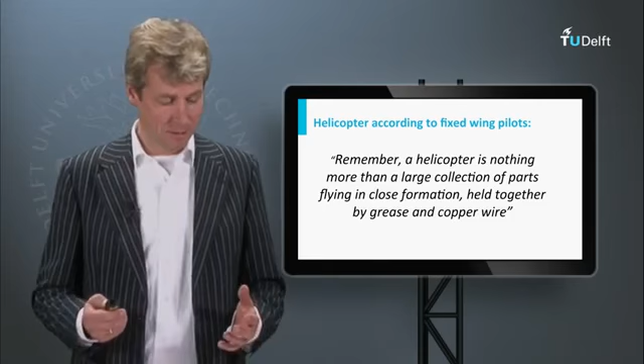And why is this? Well, when you sit in a helicopter, everything vibrates, everything shakes, and there are a lot of disadvantages of helicopters. They're noisy, less fuel efficient, and hence worse for the environment. More expensive as well, because they're technologically more complex.

So why would you want to fly a helicopter? Well, clearly, there are also advantages. The fact that you can do vertical takeoff and landing without the need for a runway, and hover and remain in position, outweighs all these disadvantages. These two lists go to show that you should never just count disadvantages and advantages to make a decision, because otherwise you would never have had helicopters.

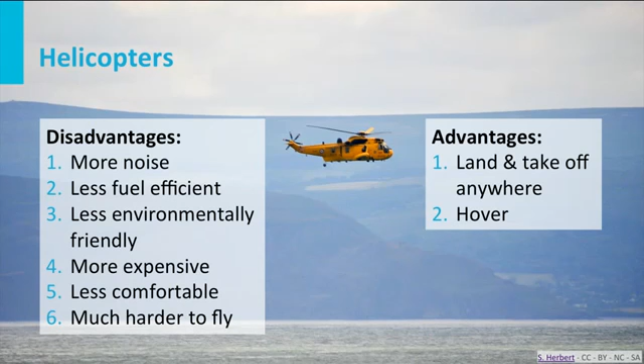And helicopters have been around for quite a while. In fact, they were already experimenting in the pioneering years, around the 30s, and they stayed experimental for quite some time, because not even during the Second World War did they really reach operational status in large numbers. It was really afterwards that we saw them. Sikorsky was one of the pioneers who was able to overcome the complex problems which you have when you fly a helicopter.

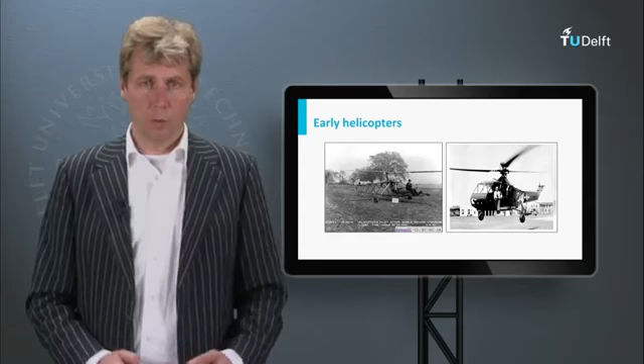And why is that? Well, one of the reasons is that everything is connected. If you look at the principle of a helicopter, we see the rotor having two functions: it provides both thrust and lift. And this makes a nasty connection between the vertical and the horizontal forces.

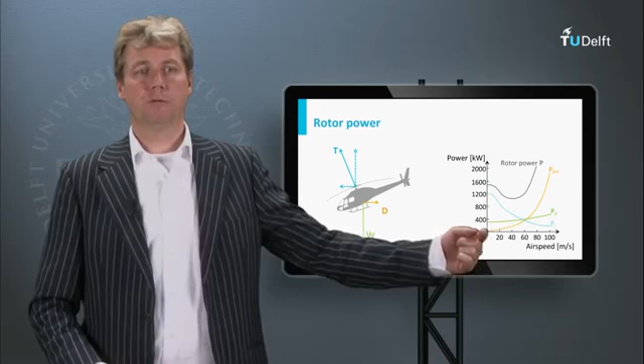Also, an example of a complication is if we look at the power which is required, we see that the lifting power actually decreases when you increase the speed. But of course the propulsive power that's required, the yellow line here, increases. That's because when you increase the speed of a helicopter, the rotor also starts to act as a wing and generates its lift without the need to bring it via the torque to the rotor. So you see that the required power, depending on speed, first decreases and then increases. That's a very strange relation already just looking at the overall perspective of the force equilibrium of a helicopter.

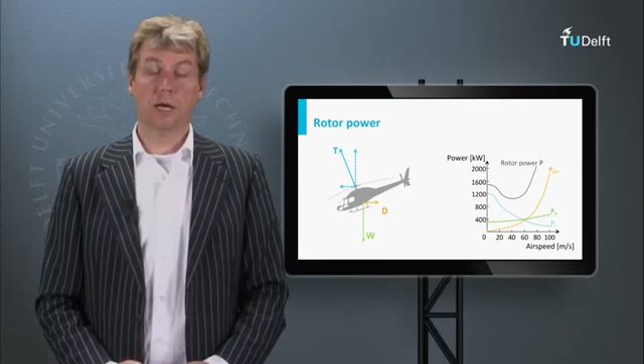But what's even more complex is how to control a helicopter, because there are many things to control. Let's have a look at these controls. I hope you can see it.

There is a stick which is called the cyclic control, and this you can use to bank and control the attitude, both in the longitudinal and in the lateral direction. It's called cyclic control because you change the angle of attack of the rotor blade when it's on the right side, and for every rotor blade this is something that cyclically happens. So you change the difference between the left and the right side, or the front and the aft side, for the angle of attack of the rotor blades. In this way you can bank or pitch up with a helicopter. That's the cyclic control with the stick.

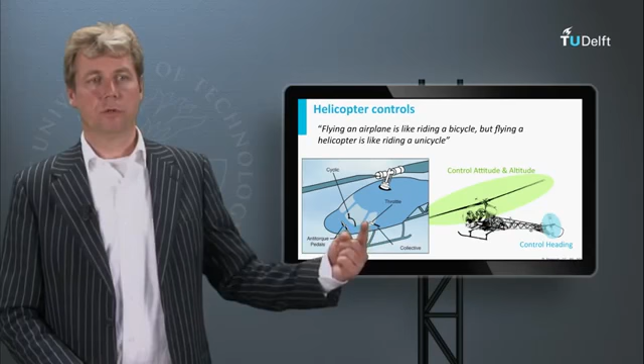But there's also the collective control. It's a bit like a parking brake in a car. If you pull the collective control, you increase the angle of attack of the rotor blades collectively, that's why it's called the collective control. And on the same handle, the same lever, you will find the throttle, which is a twist grip, like a motorcycle, with which you can increase the amount of power that's being fed to the rotor by the engine.

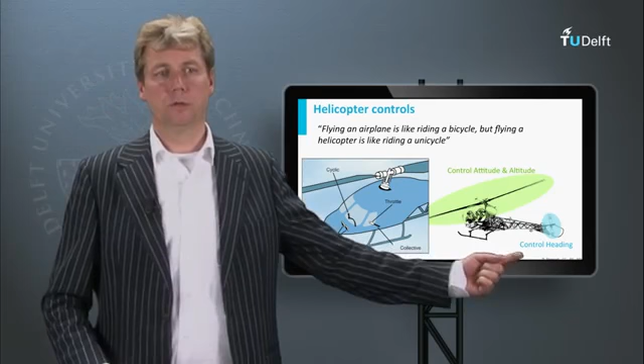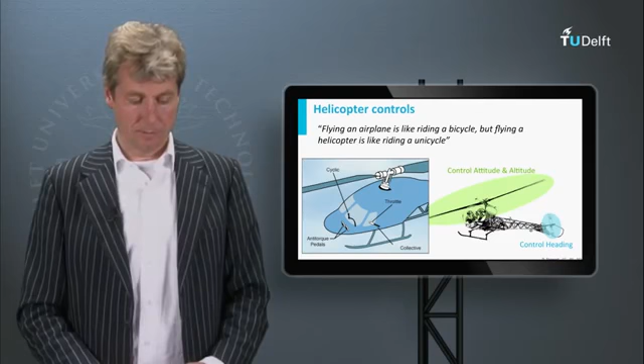Then to control the heading of the helicopter and to counter the torque of the rotor, we also have the pedals, in the same position as where you'd find the rudder pedals in a fixed wing aircraft, to control the amount of angle of attack of the tail rotor, so the amount of side force created by the tail rotor. So these are more controls than in a fixed wing aircraft, where the whole cyclic collective thing is absent. And this makes helicopters very hard to fly.

We have a video clip of a gentleman showing that helicopters are very hard to fly. He has not had flight lessons in a helicopter yet, but he has bought one already. And as men typically do, they don't want to wait until they finish the complete manual when trying something new. In his defense, he did not intend to fly the helicopter, he just wanted to see whether it was operational, so he turned up the engine to see whether it functions. When you've acquired something this expensive, I can understand that. Let's see what happens.

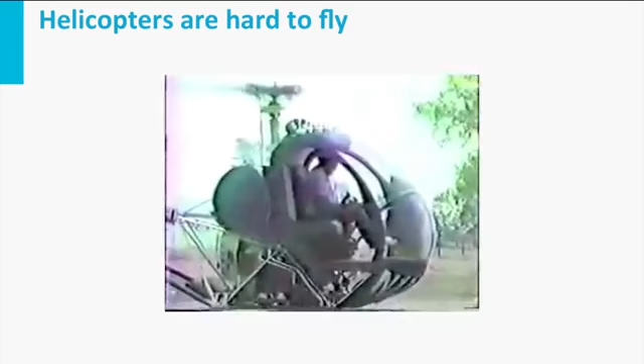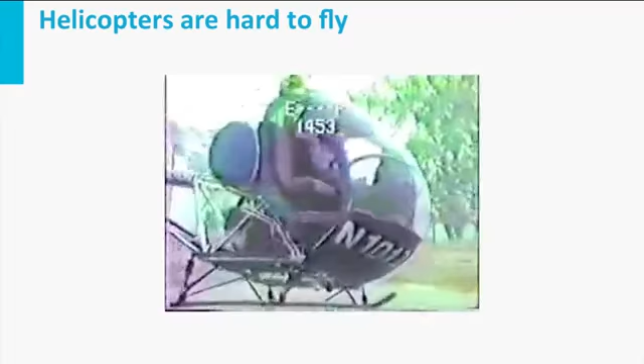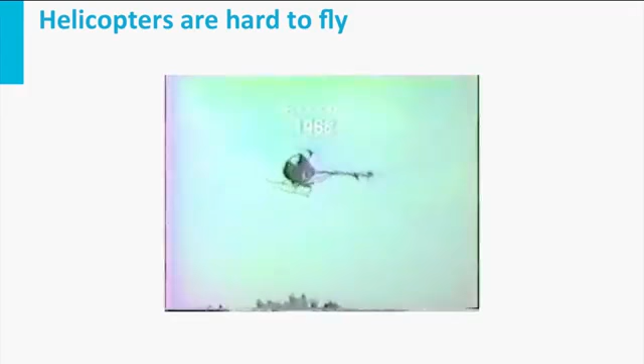So here he sits in the helicopter, the engine has already started. See the rotor turning. And of course, to really see whether the rotor works, just a few inches off the ground wouldn't hurt, right? Well, this is already more than he ever intended to fly, so he now decides to quickly land again. But it's not as easy as it looks.

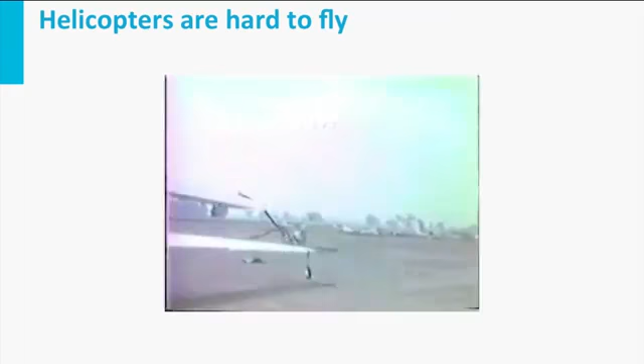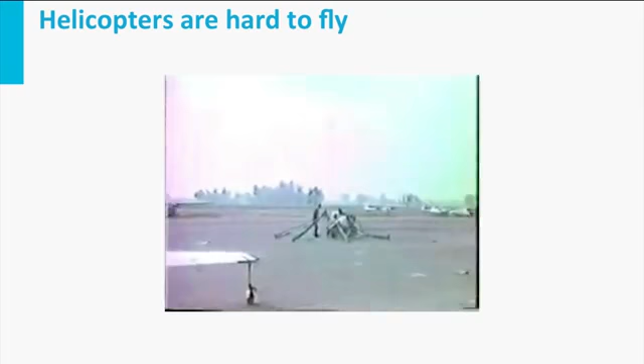The cameraman taking cover. And this is then what's left over. In fact, he survived, I think, mostly unharmed. But his new helicopter didn't.

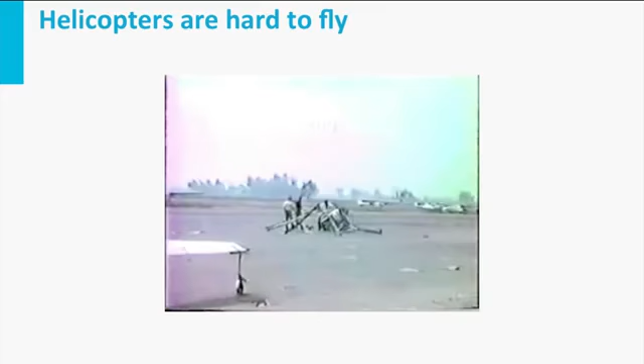It's like a wing being blown at from the other side. You can see there's a huge difference between the lift generated on the left side and on the right side. So as soon as you go forward, you get a huge banking effect, because one side of your rotor disc becomes more efficient while the other becomes way less efficient. This was actually one of the reasons people initially argued a helicopter would never fly. It could maybe fly vertically, but flying horizontally would be too complex, with the equilibrium of forces and moments changing all the time.

But now try to imagine what to do about it. We want to change the angle of attack of the rotor differently using the cyclic, depending on where the rotor blade is during the rotation. We can compensate by decreasing the angle of attack on one side and increasing it on the other. But of course, the rotor blade that's on this side at one moment will, half a cycle later, be on the other side, and then it needs a different angle of attack. That's technologically not an easy problem to solve, and it was one of the reasons it took so long for the helicopter to become operational.

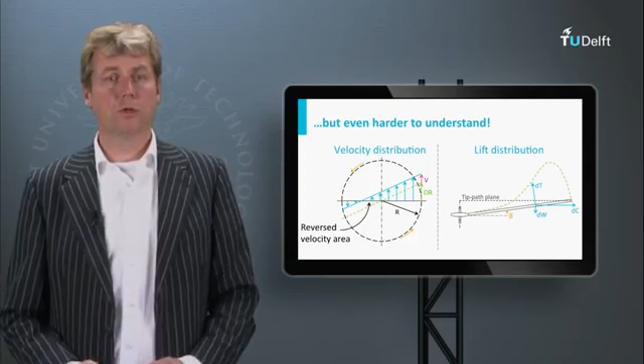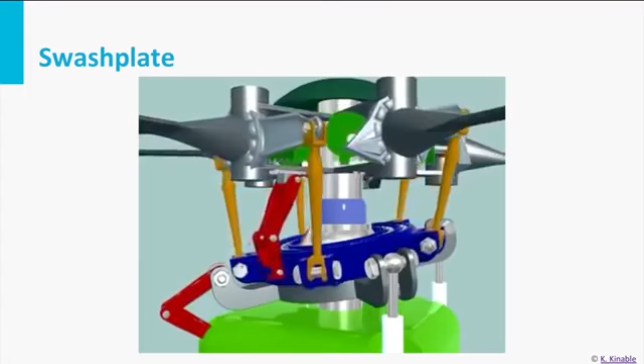But now if we start moving the cyclic as well, we'll see the angle of the swash plate changes. This means the yellow rods will pull on one side of the rotor disc and push on the other side. In this way, the angle of attack of the rotor blade changes depending on its position during the cycle, which is exactly what we want.

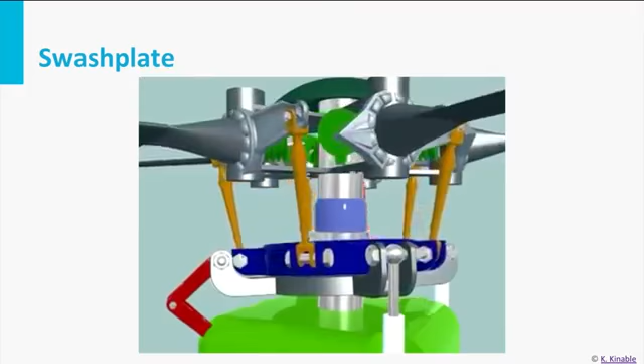But imagine that there are huge forces on these rotor blades. So we have to make something that's able to transfer the control force, but that shouldn't create a lot of friction, and it should be able to resist the huge forces which we have on the rotor. Not an easy problem to solve, and technologically an extremely complex system, but also a very elegant invention.

And this also means that if something happens to the tail rotor, your helicopter will start spinning out of control, and this is the cause of several crashes.

But it creates another nasty interaction between symmetrical flight and asymmetrical flight. The risk of losing your tail rotor or breaking something has also caused people to look for alternatives, simpler alternatives, or to investigate whether we could do without a tail rotor.

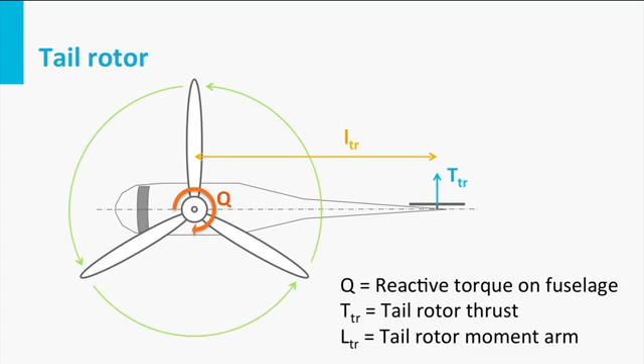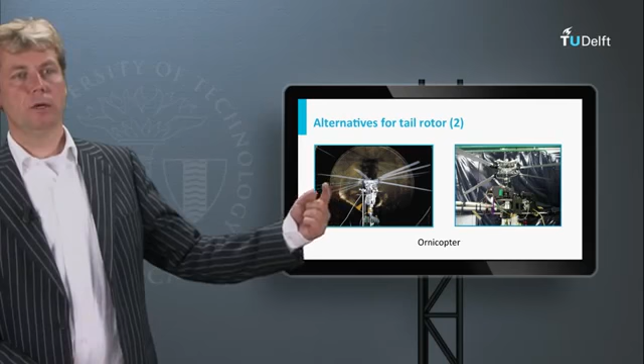But there is even a fourth way, invented in the Faculty of Aerospace of the University of Technology in Delft by Professor van Holten, called the ornicopter. In this special helicopter, the rotor is flapping, similar to flapping wings, but a flapping rotor, creating the rotation this way, and this takes away the need to feed torque to the rotor, and therefore also takes away the need for a tail rotor.

It's an unbelievable principle. You see an engine feeding energy to a rotor, it starts to rotate, but still you don't need a tail rotor. It seems to defy Newton's principle of action and reaction, but in fact it doesn't, because only energy is fed to the rotor disc.

Well, if something happens to the tail rotor, you immediately have to make sure that you no longer feed torque to the main rotor disc. This means basically switching off your engine, or switching it to idle at least. And this means, of course, that you lose your main means of lift. Also, if your main engine fails, the same happens. Surprising thing is that with a helicopter you can still fly then.

We already saw with the power requirements that when you move forward, a rotor disc can act as a wing. In fact, the gyrocopter vehicle uses this principle, using a rotor as a wing. And as long as you use your altitude to gain speed, you can use the rotor as a wing to fly. Then in the final part, you can take out the energy of the rotor disc by reversing the flow of air through it.

So first, when the engine is still on, you fly like this. When you lose the engine, you quickly dive to maintain speed. And then in the final meters, you make sure that you use the energy stored in the rotor disc to make a safe landing.

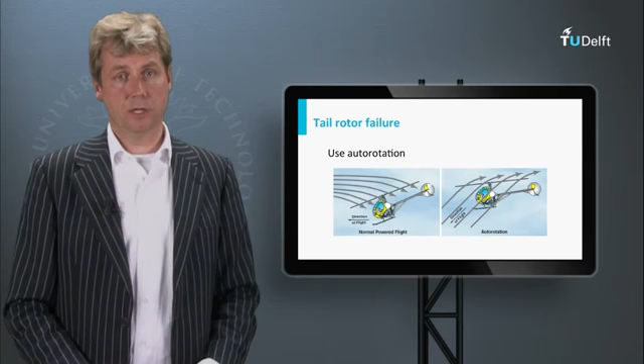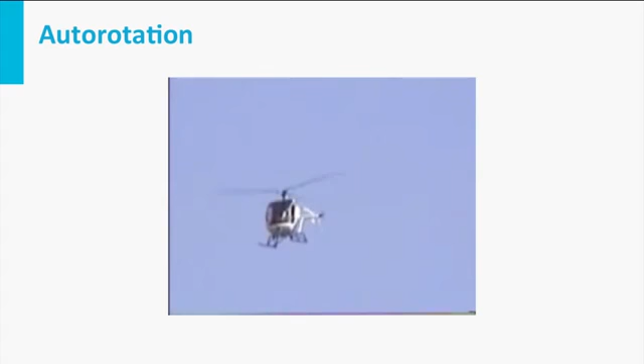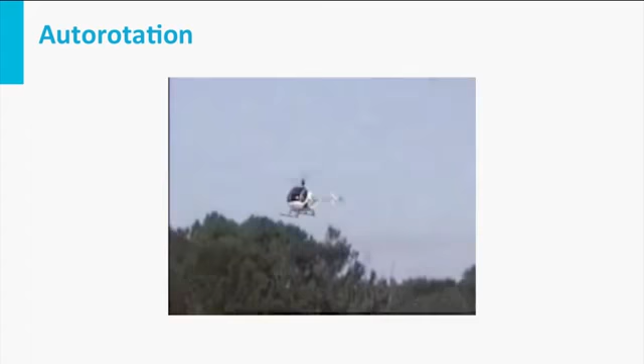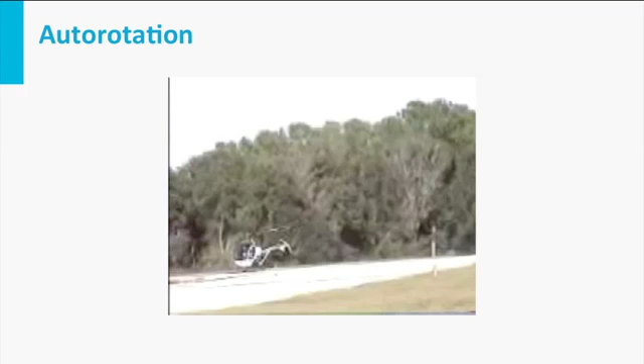And now it gets really close. It's hard to see here because they're probably zooming out with the camera now. It has quite some horizontal speed, which you also need to lose. So just like a normal plane which you would flare, you do a nose-up maneuver to take out the energy of the rotor.

And this doesn't look like a very violent landing. It's easy to survive, but not an easy maneuver to fly. So it's another reason why helicopter flying is hard. For auto-rotation, you need altitude and speed. And this means that if you don't have them, you don't have the kinetic and potential energy to perform an auto-rotation maneuver, you're actually flying very dangerously.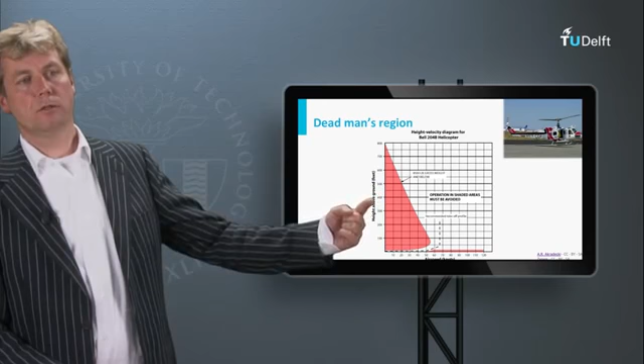This is sometimes depicted by this diagram, where you can see that if a helicopter is taking off vertically, initially it will be very close to the ground, but very quickly it will not have a lot of altitude and also not a lot of speed. This means you're in this red zone, called the dead man's region or dead man's triangle of a helicopter. If you have sufficient altitude, you will have plenty of energy, and in this case it ends at around 800 feet, as an indicator, so it's quite low.

But you have to try to stay out of this dead man's region, and that's why it's preferable not to take off vertically with the helicopter if you don't have to. So with the helicopter, normally you would lift off only a little bit and then first gain speed, and as indicated by the dashed line here, you avoid the dead man's region by first gaining speed and then gaining altitude.

And the reverse is also true, so separate from the triangle, there's also this zone very close to the ground, where even though you have some energy in the form of speed, you will not be in time to react, and therefore that's also a very dangerous zone.

This means that normally with a helicopter you fly a flight profile at an airport not that different from a normal aircraft, because you have to move horizontally as well, which also makes it easier for air traffic control at the airport. It also means that a trauma helicopter that lands somewhere downtown vertically and takes off vertically takes a huge risk, which is worth appreciating.

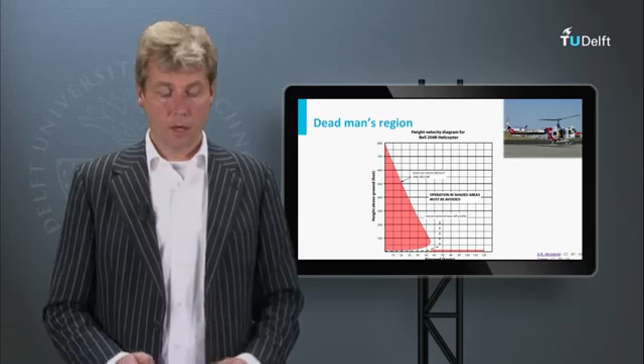So that covers the part of helicopters, but there are more special vehicles. You will see them in the next clip.